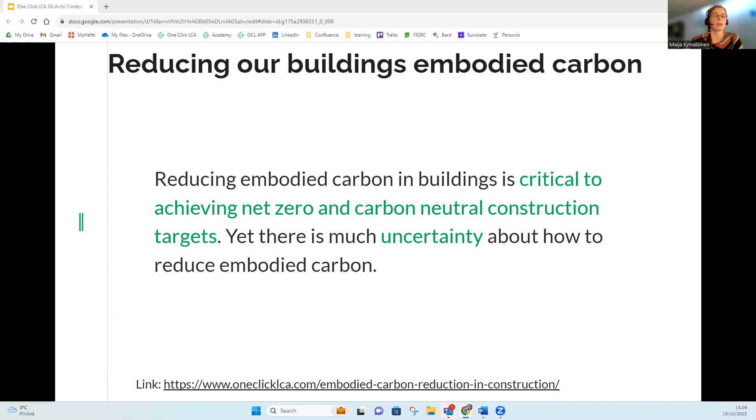We created an example baseline building design to quantify the potential impacts of adopting the different embodied carbon mitigation strategies. I've added the link here if you wish to check it out from the original document. Based on this baseline building, we will see, if we check all these principles, how we can reduce the embodied carbon emissions. So our baseline building is a 7,000 square meter office building. It has 7 above ground floors of 1,000 square meters each, 2 underground parking levels, a precast concrete frame, and a 60-year assessment period, assuming that the building would be kept in a condition pleasing to third parties.

So before we actually go in to see the strategies, I would like to remind you that when you begin working on embodied carbon, you should always make sure that your building has a decent energy performance and whatever low carbon energy supply options your locality can afford or offer. Even though we are talking about embodied carbon, we do know that operational carbon is very much still there, and it's not going anywhere, at least anytime soon. So you need to consider these as well.

And also something that probably is a difficult thing to achieve as an architect: avoid sites where transport relies on private cars and long transport distances for users. But if it can be relocated, it is worth thinking about the options, so we can avoid private cars as much as possible and rely on public transportation. This is, of course, outside the building LCA scope, but it's something that in a holistic approach you would have to consider as well.

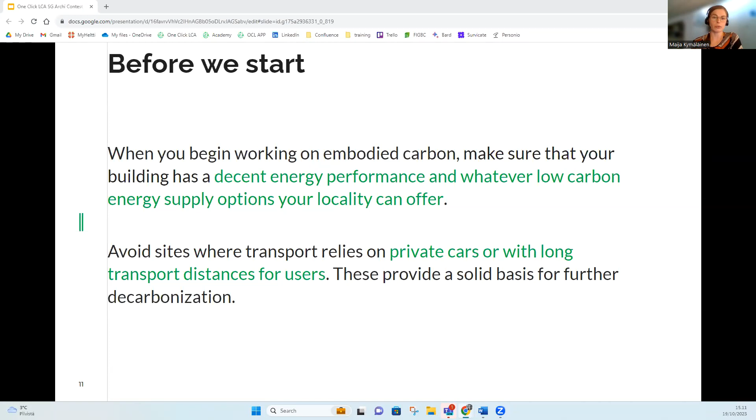So the first commandment, do not build for short term, is basically the most effective. Optimizing the life cycle impacts for anything less than a 50-year span is basically not worthwhile. The shorter the service life of a building, the more impacts you will get per year. So if we build for 100 years, we have, of course, 10 times less impacts than if we build for 10 years, because everything would then be replaced every 10 years. So the longer buildings last, the more sustainable they are.

And if the need for the building is not sustainable, for example, if there are ongoing demographic changes or zoning changes, this may be addressed by designing either a building that is highly adaptable or a modular transportable building that satisfies the demand for a shorter period of time. For example, in Finland, we have a lot of daycare buildings that are built so that they can be moved as they are to somewhere else. Because they are often built in areas that have a lot of construction and people moving in, there might be a need for a bigger building at some point, so the smaller temporary building can just be relocated to another part of the city.

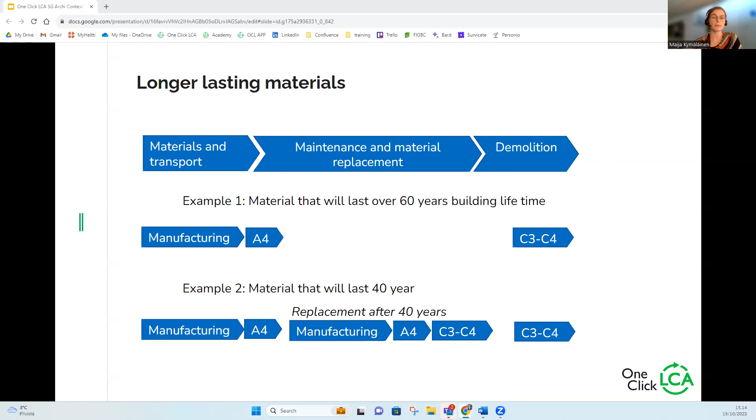And the potential carbon savings in our baseline building are up to 50%. Compared to a situation where the service life is limited to 25 years, the annualized materials-driven carbon impacts are, in this case, 120% higher. And if the building can be converted to another use, the impact is reduced even further. So after the service life, if you can use it for something else, that's even better.

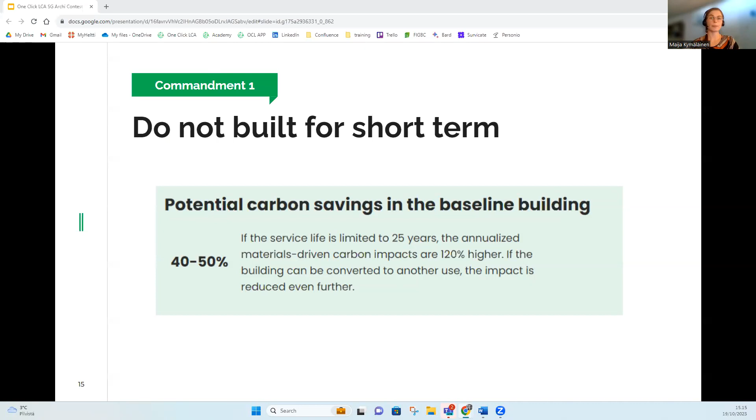The second commandment is to avoid sites requiring soil stabilization. Deep foundations can usually mean quite high emissions because they require a lot of materials, and this material is usually cement, concrete, and steel. These are all very carbon intensive materials.

And of course, I recognize that architects don't really have the means to affect site selection. But if you have the ability to influence the way the building masses are divided on the site, that makes a big change. So what you should consider is the distance to bedrock, and think about ways to mass the building so that the biggest masses are where the distance to bedrock is the smallest. It's also worthwhile to think about the overall mass so that the required material for the foundations would be reduced as much as possible.

But if you are committed to the site and you cannot avoid these foundations, you should think about the mass, the bedrock, and lighter frames, for example timber or steel. And finally, you should avoid cast-in-place concrete, which tends to result in the heaviest of all structural solutions.

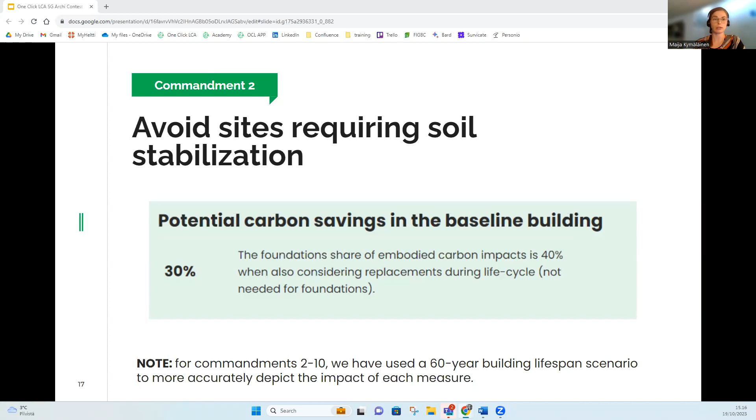And then the third commandment: consider structural options. Could a lighter or a timber frame work? In general, the structural frame is responsible for the majority of the impacts, and it should thus be addressed as a priority. Reducing the mass of the frame reduces the need for foundations and, of course, the overall material need.

Wood, for example, is a relevant material to consider. These materials are inherently less carbon intensive, so they require less energy to be produced. For concrete, you would need the excavation of minerals, the crushing and processing of those minerals, and a huge amount of energy for calcination and so on. But for wood, you need energy to harvest and transport, and sawmills often require little external energy because they can use residues such as bark and sawdust to create heat for drying and other processing.

Wood is also a natural, renewable material. If you harvest from sustainable forestry, new trees will replace the ones you remove. And it's a natural carbon storage: about half of the mass is carbon that is removed from the atmosphere and stored as long as the wood is in use. At the end of life, the wood is usually burned, so the energy released replaces energy from other sources, which nowadays is mostly still fossil. Wood also has good strength to mass properties, good thermal properties, and is rather cost effective. So choose wood if you can.

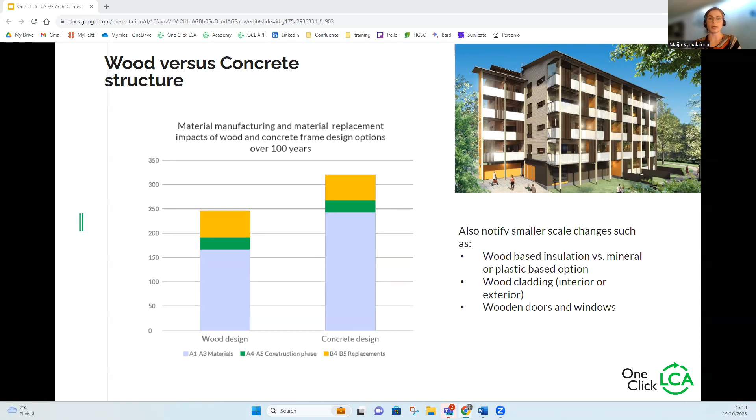In this graph, we have a comparison of a wood and a concrete frame. With wood, we can achieve a 10 to 20% difference in embodied carbon, considering that the structural performance is the same. It should also be noted that smaller scale changes, such as insulation, cladding, and other building parts, can also reduce the impacts, because the small savings pile up and can result in a significant reduction. So the potential carbon savings in the baseline building are again 30%.

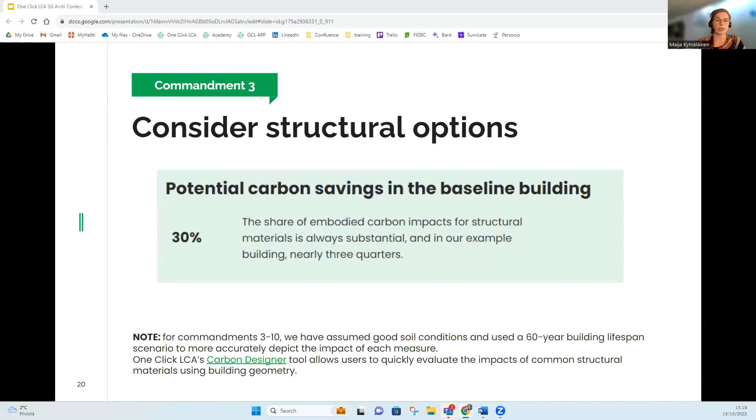And then commandment 4: choose low carbon products. This should be done by setting clear requirements and selecting the right suppliers. The requirements could specify, for example, minimum carbon performance targets or other measures, such as stipulating the use of recycled binders for concrete.

This strategy works effectively for all materials where supply is competitive and some suppliers are willing to supply products with improved environmental performance. And comparing these products is becoming easier and easier as producers are producing more and more EPDs, which are, as we talked about, very reliable documents on the environmental performance of a material.

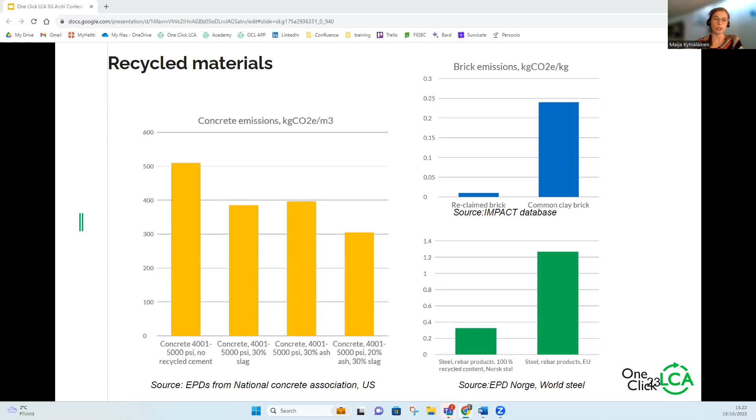And then in green, we see steel rebar. So there's an average EU value as the high column, and then a smaller column for this 100% recycled content. So again, steel is of course quite easy to recycle. So it's a much more energy efficient process. And then choose low carbon products. So potential carbon savings in the baseline building is around 10% in this case.

Commandment 5 is to optimize the building shape so you can achieve a mass reduction with a compact shape. So as a general rule, a simple shape is more materials and energy efficient. So the smaller the material quantity, the more efficient building you have, of course. So a more complex shape drives these external wall demands, for example, and also requires additional access corridors. And what should be noted, of course, is that elevator shafts, for example, are needed in different locations if we have a bigger building or a different shape, and corresponding room area increases.

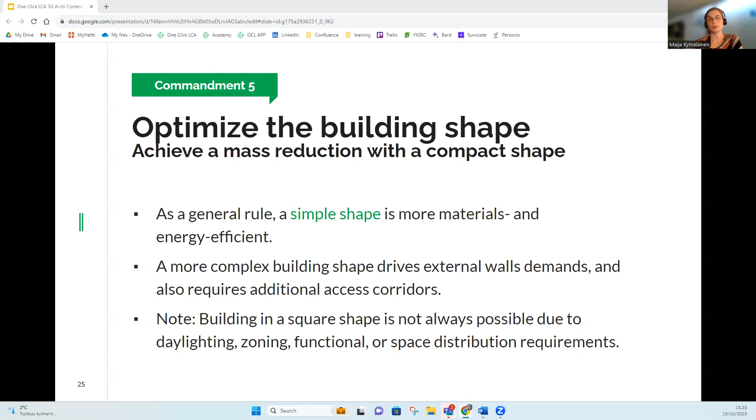However, it's not always possible to create square buildings, but it does not change the fact that simple shapes with comparable function and materials mean lower impact. So this is something to consider, taking into account, of course, the zoning, functional, and space distribution requirements, for example. And the potential carbon savings in the baseline building is about 10% here.

Commandment 6 is to design thinner floor slabs. So horizontal structures are responsible for a big part of the embodied carbon emissions. And unlike the envelope, the amount of slabs scales linearly with the internal area requirements. And also, we can reduce the envelope height if we reduce the thickness of these slabs. So, of course, they provide structural, acoustic, and fire-resistant capabilities for the building, and may also embed piping and other installations. But there is usually at least a bit of room to reduce the thickness.

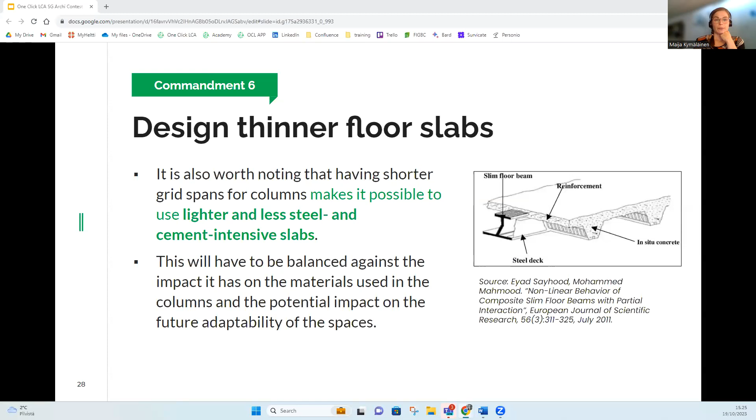And some good practices include using these innovative technologies, for example, Delta Beam, Bubble Deck, and hollow core slabs in concrete construction. So, of course, do bear in mind that care should be paid to overall design and choice of the floor slabs used. But then again, it should be noted that having shorter grid spans for columns, for example, makes it possible to use these lighter and less steel and cement intensive slabs. And in our baseline building, this results in a potential carbon saving of 6%.

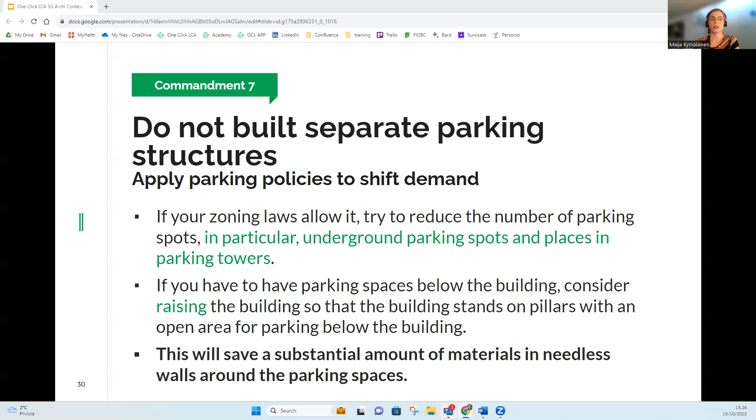Then commandment 7, you should not build separate parking structures, and preferably apply parking policies to shift the demand if your zoning law allows it. So in particular, underground parking spots and places in parking towers should be avoided if possible. But if you have to have these parking spaces below the building, you should consider maybe raising the building so that the building stands on pillars. And this will save a substantial amount of materials from these walls that are not needed anymore.

So here's an example. The initial concept was to have two basements for car parking here, but removing the retaining walls and having the customer agree to one parking floor only, we got a really high reduction in the building impacts. So this was almost 5% potential reduction in carbon.

As commandment 8, we have use movable or refurbishable wall elements, so designed for adaptability. And this is to solve space redistribution issues. So as the floor plan configurations may often change, for example, in offices is quite common, it's a good practice to use these reusable and possibly movable internal walls to the extent that they work for the building function. So similarly, the electrification that tracks seating arrangements in office buildings.

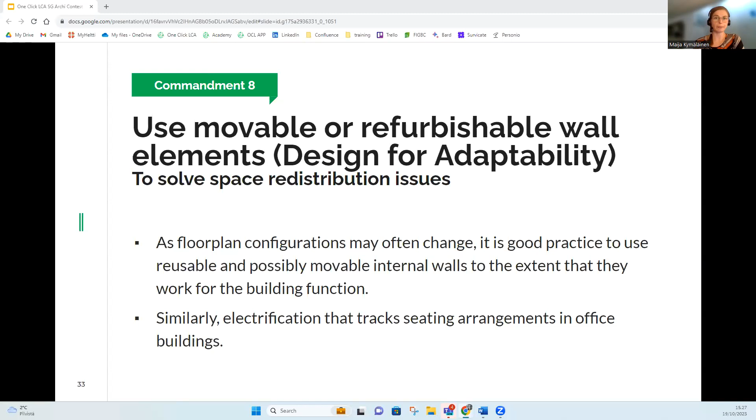And this design for adaptability means that in the future, if I need to do refurbishment, it should be as easy as possible. And other methods are, for example, applying construction practices that make it possible to remove the elements intact. So this is called design for disassembly. And in our reference building or baseline building, we got a 4% potential carbon saving by using these movable or refurbishable elements.

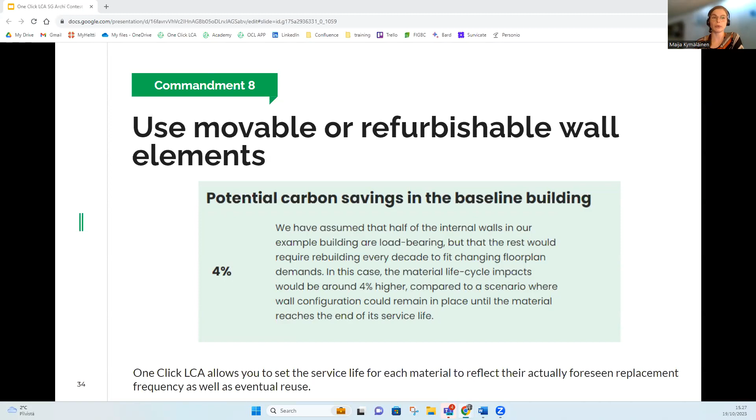And then as 9, avoid elements with limited value. So this means flooring, ceilings or facades mainly, but also, of course, other elements. So if your material provides only an aesthetic function, maybe consider omitting it. If your internal ceilings are, for example, not providing acoustic or fire protection, the entire element could maybe be removed. And this would also allow better maintenance, access to installations and cabling. So no need to take anything apart to reach them.

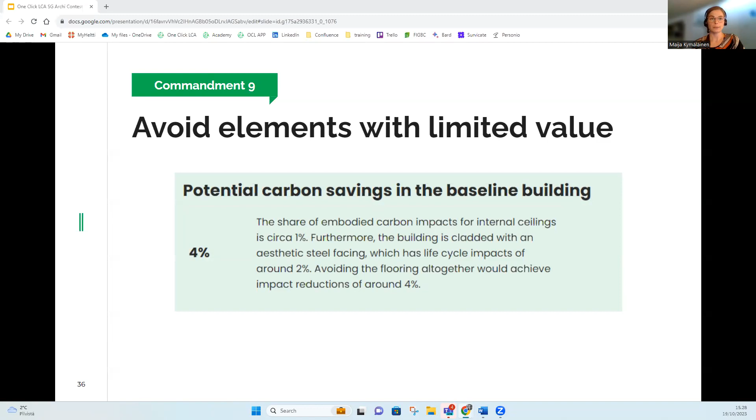And the same consideration applies to flooring. So a simple polished concrete floor could be a good option for some types of spaces. Of course, not all, but this is something to keep in mind. The potential carbon savings here were 4%. So here we considered if the building is cladded with an aesthetic steel facing, and also we took off the floors and used only this polished concrete. So these two choices. And also, internal ceilings were also taken out.

As commandment 10, choose long-lived solutions for windows and roofing. So investing in durable materials means fewer replacements over time, which again means fewer carbon emissions, less waste generated, lower life cycle cost, and less tenant disruption. And of course, it's very cost effective because you are using materials for a longer time. So the replacement need is smaller, and thus you also save money for the client. So what is durable and suitable material for your market varies depending on the conditions, but the principle stays the same. And potential carbon savings here are 3%.

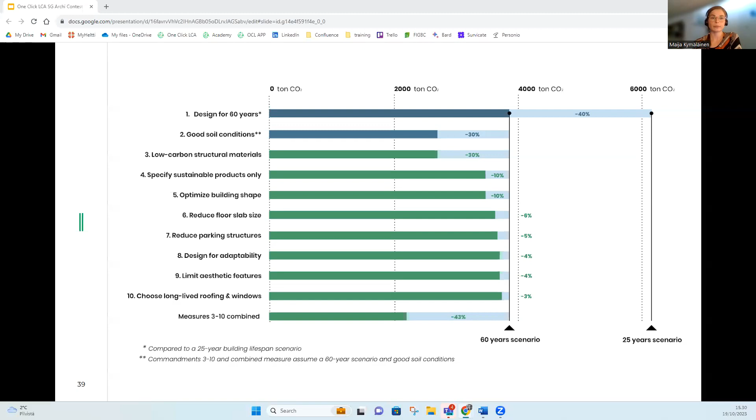And of course, these 10 commandments are not all. There are many more, of course. And these could include, for example, incorporating design for disassembly and other circular economy principles into the design, buying local materials whenever possible to reduce transport impacts, ensuring structural material strengths are not generalized but optimized for different uses, reducing waste through careful specification and buying with take-back agreements, and considering, of course, the material longevity.

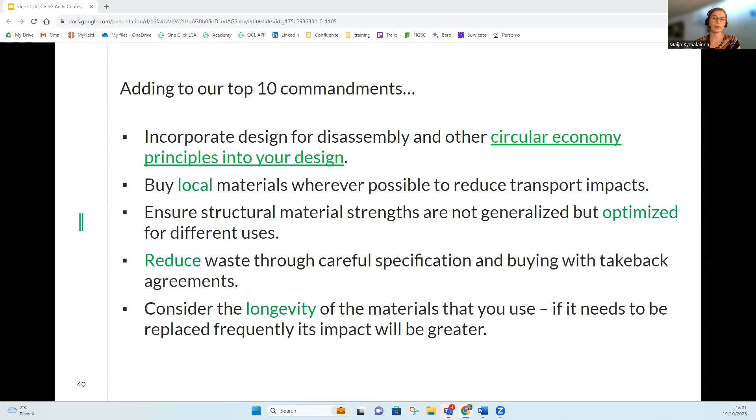So even though something might seem better on paper, with small impacts, if it means that it has to be replaced more often, then we get again these material manufacturing impacts that just multiply as many times as the material needs to be changed. And since the contest also entails this refurbishment project, I would suggest you check out these 10 ways to reduce embodied carbon emissions in refurbishment. So if you click that open, it shows you a similar kind of report, but adapted to refurbishment.

Yes. So let's apply these practices in an example project. So I will now move over to One Click LCA. First, I will quickly go through how to register and activate your account. So go to oneclicklca.com, log in, new user, register, fill in your information, and then once you get the email, you activate your username and then log in to the platform.

And then what you have to do to activate your account is to create a building project, by following these instructions. But now I will actually go here to show you once more. Let's check.

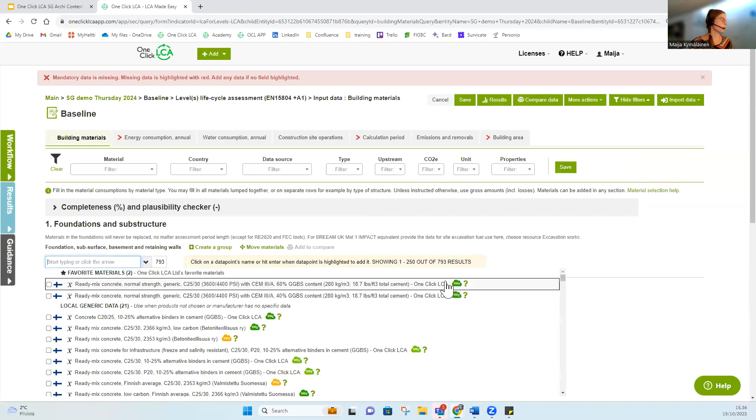Let's see, something for the foundations, for example. Let's see what we have here. Okay, we could go for normal strength or something else. I will go and find C50 concrete, so ready-mix concrete with high strength. And we will choose a very generic one. So this one has very little recycled content in it. Let's take this one, for example, and we are going to make a foundation slab. So this is 2,000 square meters times, for example, 50 centimeters. And then we click save.

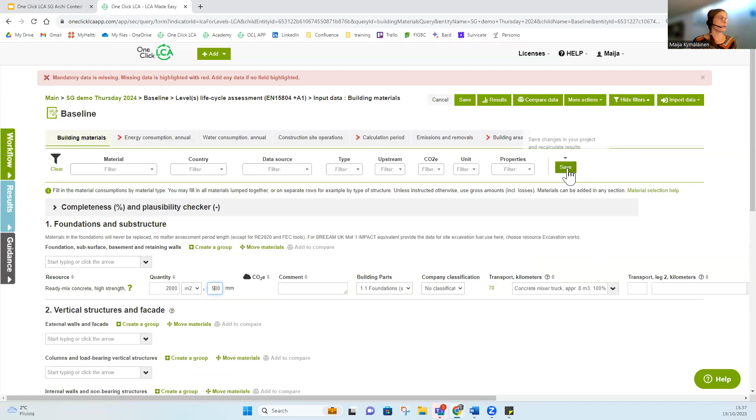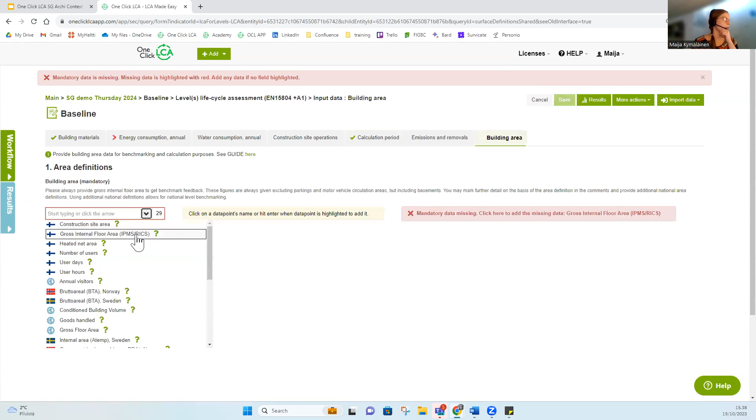And before we go check how it looks, I am going to go to electricity consumption and just put 0 there because I want to show just the materials. Hope that it works. We are calculating for 50 years. And the building area is 10,000 square meters for gross floor area. Yes. Okay. Save. So now we only have that one concrete data point there. We are going to save these and go to the main page. So whenever you click this, you go to your project base.

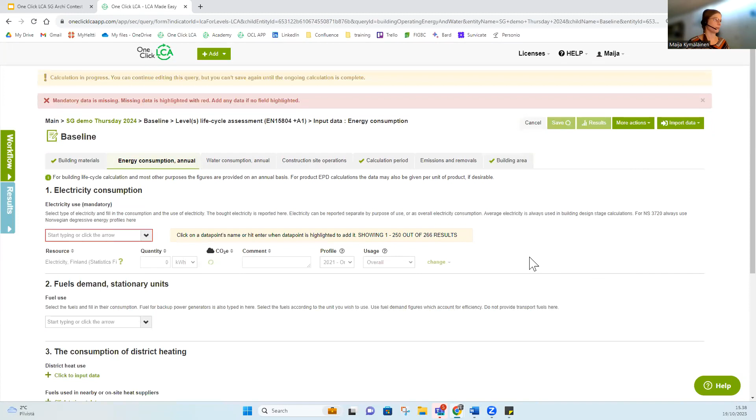And it did not approve of my 0. So I'm just going to check with 1 if that works. Oh, yes, sorry. Of course, I need to select the electricity first. So that's why it was problematic. Let's see if it works now. Yes, okay, now it works. So we go to the project main page and see that we have results here. We only have this for one design, so I'm gonna add something else. So we create a copy for an optimized design. So I just go here and click copy. And this is copy of baseline, for example, added binders.

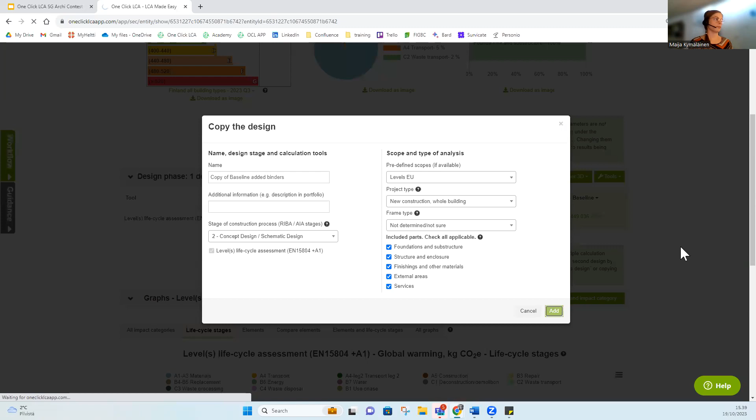Add it in. It's the copy, so it has the same materials. But if we go to building materials and we change it, so let's see, we got C50. High strength, and then we had that very generic material with no additional binders, but we are going to go with this that has, for example, 30% fly ash in the cement, so it's the same strength.

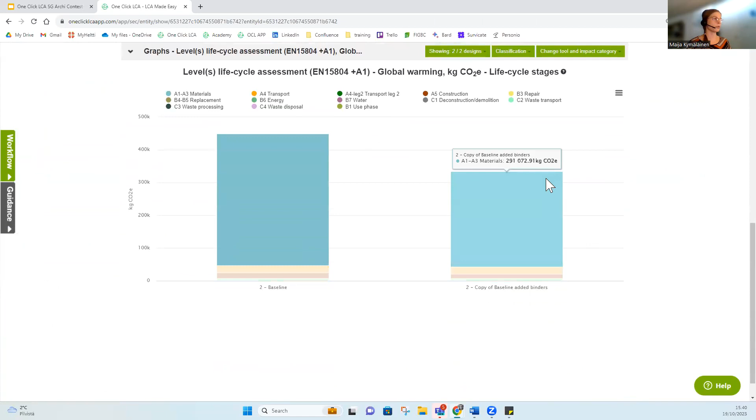This could be, I could use the replace function as well, but now I just do it like this, so it's another way of doing it, and then just remove the first one. And then we save. And once it's saved, we go back to the main page to check what it looks like. Okay, so it says that we have 25% reduction. So now if we go here with life cycle stages, we can see that we are already down this much.

And then, I don't know, the engineer comes over and tells you that a lower grade of concrete is okay. So we might want to change it into a lower grade because higher grade means higher amount of these binders in it or higher amount of cement. We make a copy again, and this is copy of baseline with lower grade. Add it in.

And then go into the design again to change the building materials. And now I'm going to do it the proper way. So go to change, replace. And now we have the quantity, but we want to have a lower grade. So for example, C25, which is something quite commonly used in Finland for foundations. So we are going to choose, for example, this ready-mix concrete, C25/30,

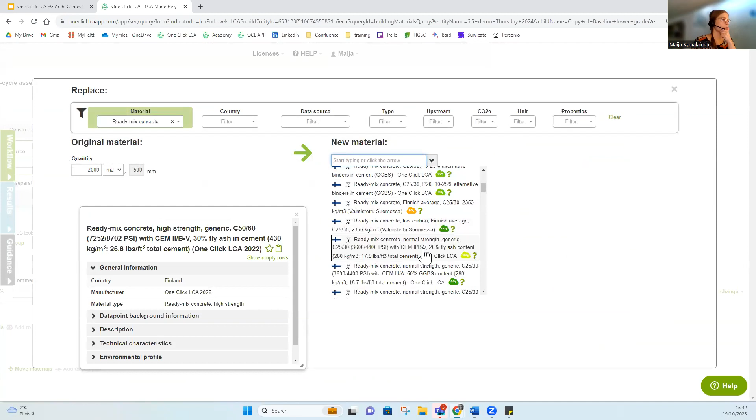with, I don't know, 60, but I think we could go with, is there anything with fly ash, for example? 20% fly ash is there. 30% fly ash. So this is the same kind of percentage of additional binders in it. And we are going to save. And then again, check the front page, what it looks like. Go to life cycle stages, and again, we are reducing our impacts for that one material.

So this is something that you can begin to think about your choices, optimize, and of course within the requirements and technical performance. So that's quite important to always think about. But yeah, this is how you could maybe start. And just as a small note, these kind of traditional binders such as GGBS and fly ash are actually running out because the need for them is so big. So new materials are being developed continuously.

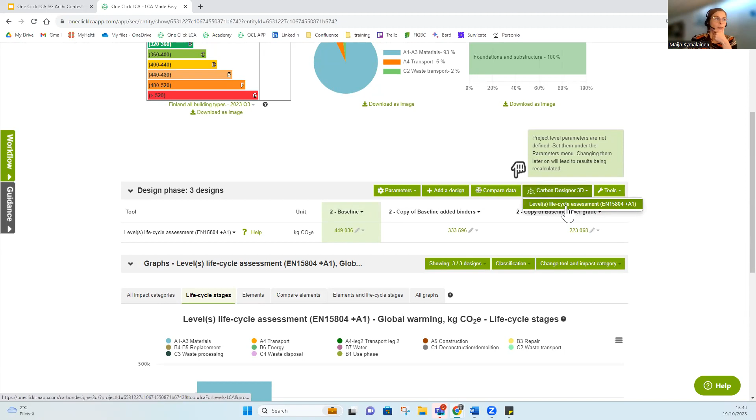But promotions aside, this is how you could do this materials comparison, but now we will look how you can start optimizing an actual building. So we'll continue with this same project we've created. And there is a tab here called Carbon Designer 3D. So we are going to use this one it asks for the tool. So we are using this +A1 for Level(s).

And then we are taken into Carbon Designer, which is another tool, but it's directly connected to the One Click LCA main interface. So whatever you do here, you can import and transfer everything you are doing. So here, you can create a design, or if you have made designs priorly, you can compare up to 4 different designs. Since we have nothing there, we are going to create a design. The first step is to enter this building information. So we are going to make a baseline building.

And it asks to enter this reference building. So what you do here is you select the one that is closest to your region. I don't think that there is a Finnish one. No, because this Carbon Designer tool is connected only to the Finnish regulatory methodology that uses only carbon as the indicator, global warming potential. So we need to choose a closest one. So that would be Swedish reference building.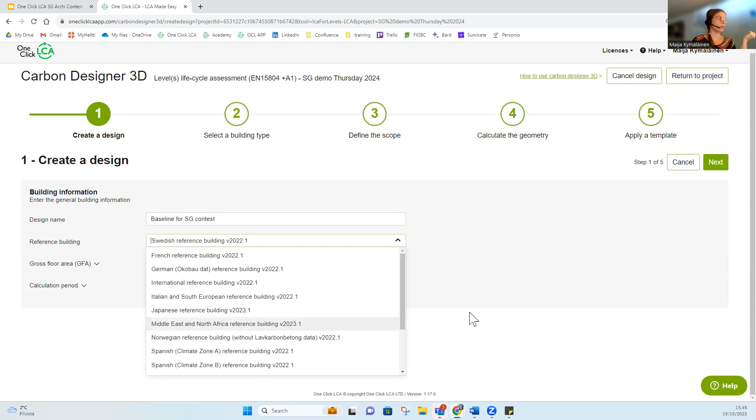And this is quite important because it makes these assumptions and calculations based on the ways of constructing in different areas. So if you make a building that is located in Finland and you choose this Middle East and North Africa reference, for example, it will give you very strange results. But yeah, we chose Swedish because that is the closest one. It's given our gross floor area here already, and also the calculation period. So check those out. If it says something that it's not supposed to, just correct it. And then we go here.

And then it asks for the building type. This is also quite important because the calculations and the building geometry and so on are related to the typical building in that area. So we go with the apartment building. So there's quite a few of these that you can choose from.

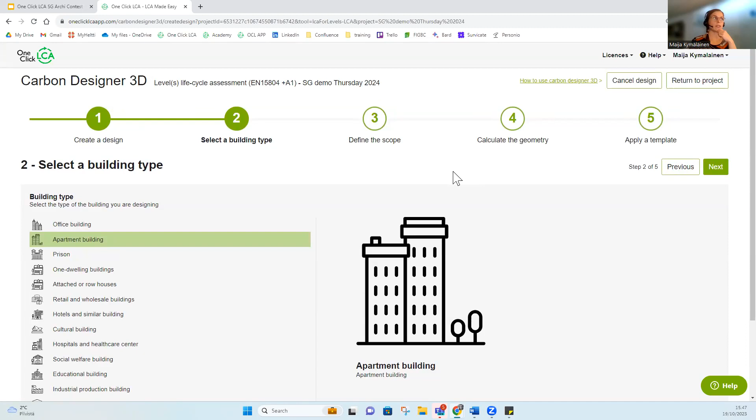And you can also do this modeling for mixed use buildings. But for that, you would have to choose what forms the biggest use. So if it's an apartment building that has a bottom floor with, for example, retail area, these kind of spaces, you would choose apartment building and then just adjust the material quantities later on. But yeah, now we go with the apartment building and click next.

So then it wants to define the scope. For a new build, we are going to have all of these. It's also worthwhile to notice that this has a lot of information. So if you click on these little arrows, it tells you what is included in all these different building parts. If you were doing a renovation or a refurbishment, you could choose to leave out some of these. So for example, foundations and ground slab might be there already, maybe also the enclosure, and just change what you want. But now we are doing this new build, so everything is included.

And here it wants to specify the number of above ground floors. So we did this already, but if you haven't done this before, you can do it here. And also the number of underground floors. So here we have one unheated floor. And then it wants to define the structural frame and foundation options for your building. So you need to define the structural frame because this affects the density of the column grid and the quantity calculation for the different structural elements.

Yeah, so I am choosing this one. This is a rather common frame type also in Finland, so precast column beam frame. Other options would be cast in situ with different column spacings, steel frame, concrete load-bearing walls, CLT load-bearing walls, and then this glulam column beam frame.

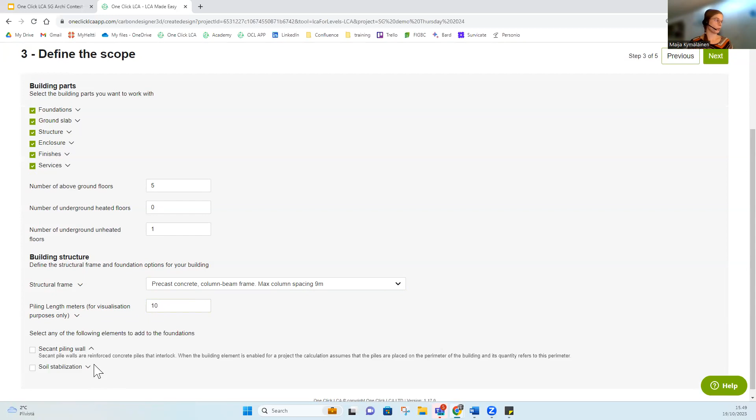And then piling length for visualization, so you can add piles. This is not accounted for in the calculation, so it's for visualization as it says. And then you can also select any of the following elements to add to the foundation, so this kind of secant piling wall or soil stabilization. And if you want to know more, you can also see from these little arrows. But now we've defined the scope, so we click next.

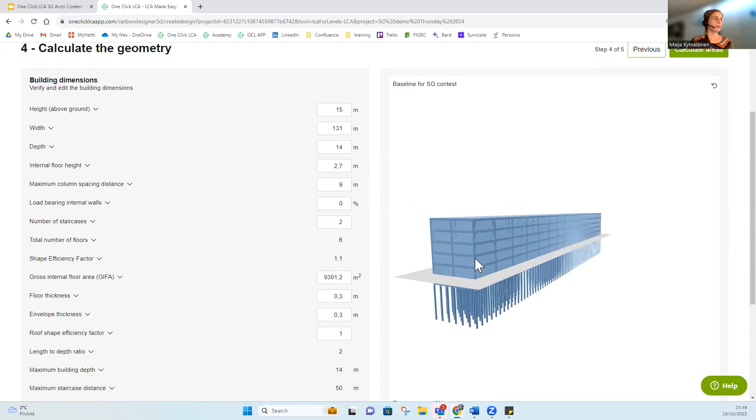And it calculates the geometry for us. So the Carbon Designer buildings are these kind of shoe boxes, so they are always rectangular. So if you have a building with a more complex shape, you would create this baseline building using this kind of shape, and then, for example, if you had different sized floors, you could calculate the added or deducted materials and then just define this later. But here you can get this quick and easy first assessment, basically.

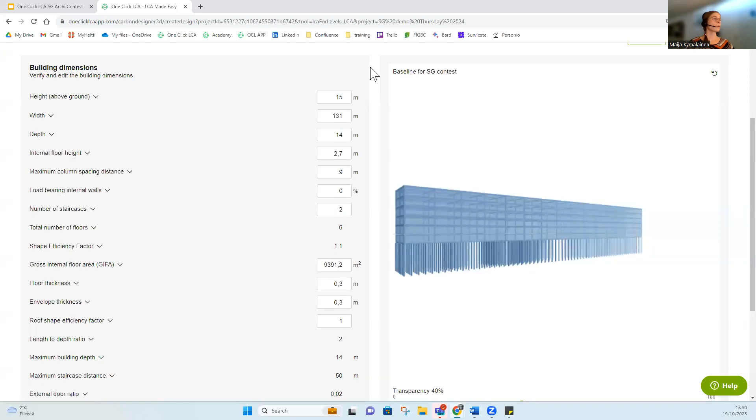And in an early stage, you might not even know what shape your building is going to be or going to look like in the end. So this is something that is very useful to do in the early stage. So yeah, this is our building. It gives us the different dimensions. You can always click again here to see what is included and also how it's calculated if you're interested. But we are quite happy with this.

So I'll click next, and then it defines the building structures as well. So here you can also edit the foundations, for example, if it needs to be smaller, or the ground slab needs to be a different size, or you decide that you want less walls. So for example, these internal walls may be something that you would like to alter. It also adds these default services. So these are calculated for our gross floor area, so this 10,000 square meters of internal gross floor area.

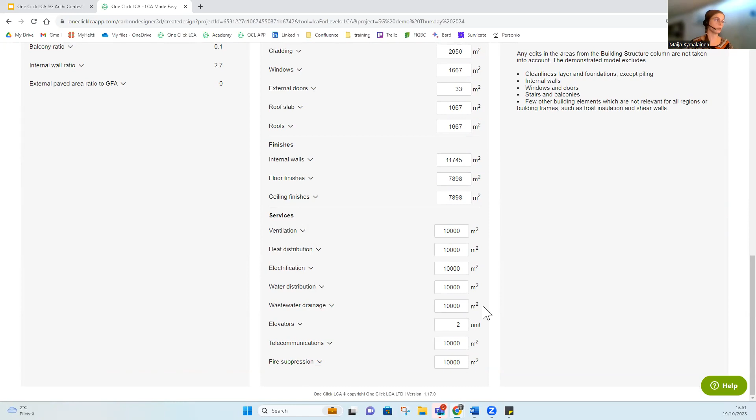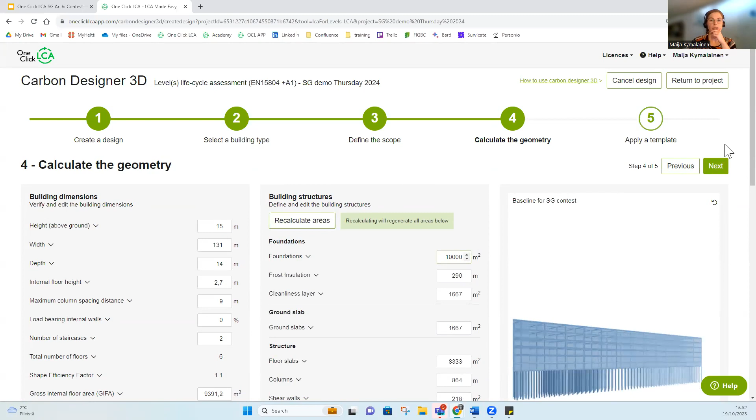And once this is done, did I have something to say about this? So yeah, these dimensions probably should not be changed if you are in this early stage and don't yet know the final dimensions. If you choose to change some of the geometry values, the other values update accordingly. So if you make changes here, I believe you need to recalculate areas. But if you make changes here, you don't need to recalculate areas. But it tells you what to do. So it's quite safe to make these changes, just if you are interested.

Okay. Oh, yes, sorry. The templates you don't need to worry about because I don't think that this license allows any templates or tool. So now we submit and it takes some time to calculate.

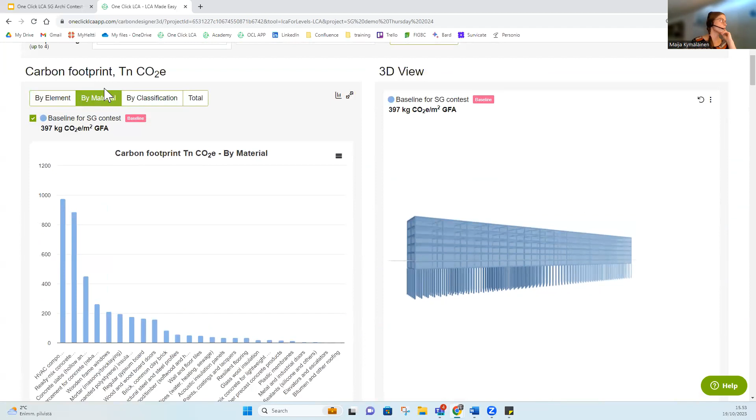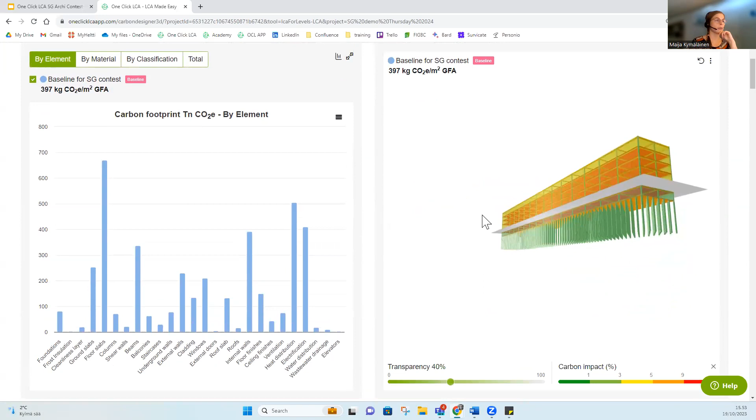And you can also choose here to see them in a different way. So this is by material, by classification, the total number. The total probably doesn't say anything now, but if we make these comparative designs, we can reduce it. And then it also shows us the 3D view. And here we can also activate carbon view. This shows us in color where the highest carbon impacts come from. So as we said, it's the horizontal structure, so the ground floor, or the floor slabs here.

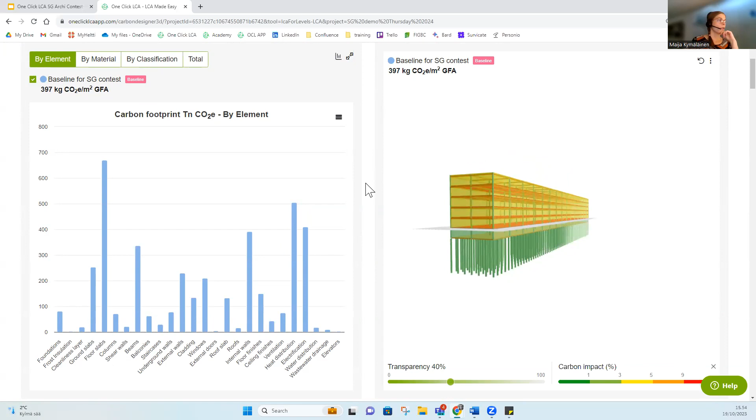Then if we scroll down, you can see the building elements and materials. These are all the elements in our building, divided by these different building parts. So we can click this open and also go from here. Here it gives us everything: what is the building part, what is the data point used for it, and also how much of the area it forms. So this is a part where you can start doing these mixed alternatives if you want. You can change these percentages. Also, it gives the total number of kilos of CO2 equivalent and how much it makes from the total. You can add comments or you can edit.

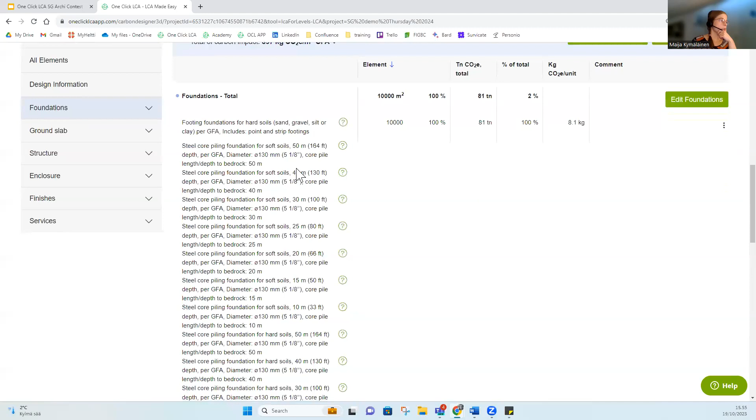So if you go to this show unused resources, it gives you a long list of different data points you can use. And these are usually interchangeable, so they correspond to each other. You can press the question mark to get more information on the data point. Let's go a bit back now. Yes, and then hide unused resources, too many to look at.

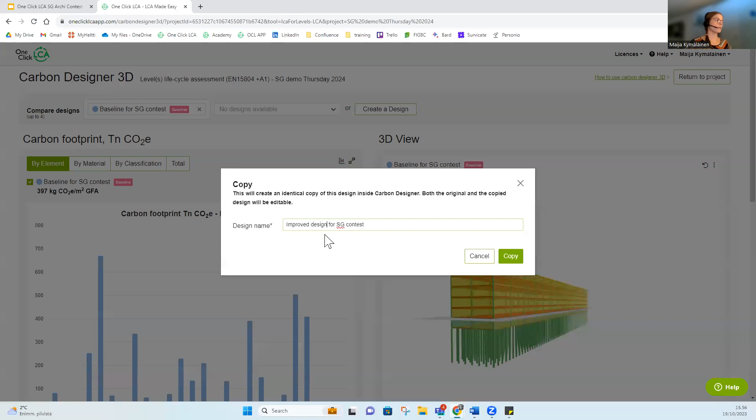So what I was thinking here is compare. We are going to make another version of this and start changing some of the materials. There's quite a lot of different places where you can do this, but this is one, so you can copy. This will create an identical copy, so we are going to make improved design copy, and it appeared right here. Next to it, it's at the moment 0% above baseline because it's the same design.

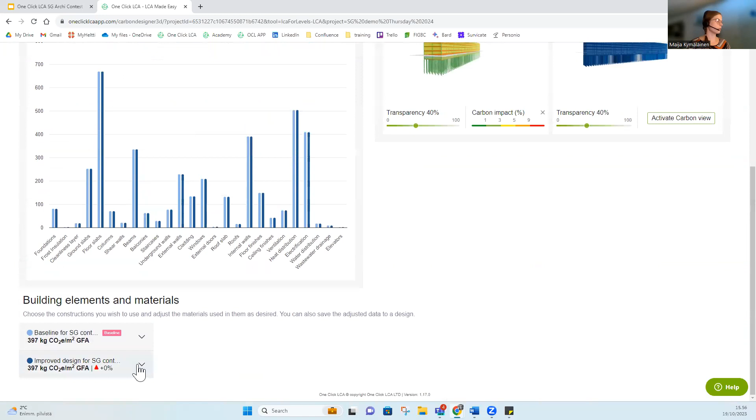So what we now need to do is to visit the baseline, click it close, and then open the improved design and all elements. So it will show everything. What we can start changing is the biggest one, which was the floors. So maybe we could change the floors if I can find them. Maybe the easiest way is to go here and just choose structure, floor slabs. Okay, so now I can see the floor slabs that have been used.

I can edit them. Get here some unused resources. I would like to put some CLT. So we are going to have CLT slab floor assembly, including mineral wool insulation. And what you can do is you can change the area or you can change the share. Usually editing the share is the easiest part. So once I type in, it starts calculating.

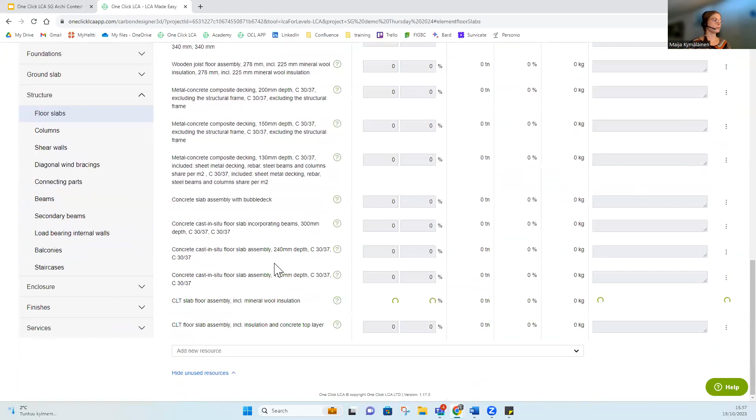And once it has been calculating, it brings it up here. So now, of course, we have 200%. So you need to put this hollow core slab assembly as 0 and then click, and then it will again calculate.

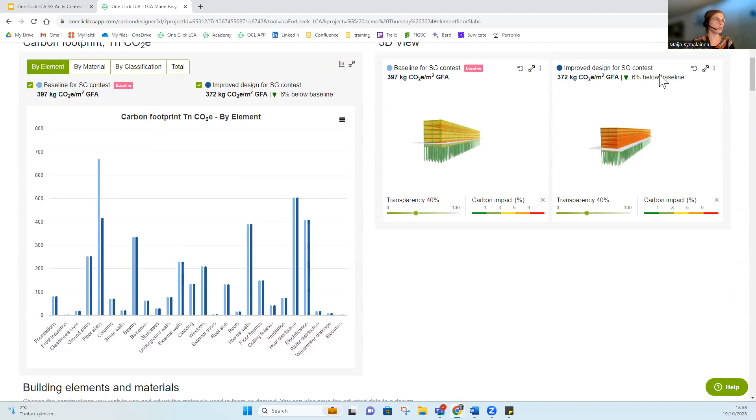So now we have changed it into CLT. So 100% is CLT, and we can finish editing. And if we go up, we can see our improved design has 419 tons of CO2 equivalent, while the baseline had 669 tons. So if we activate carbon view, we can see that the highest impact still comes from the horizontal structures, but the overall impact has decreased. We are 6% below baseline at the moment.

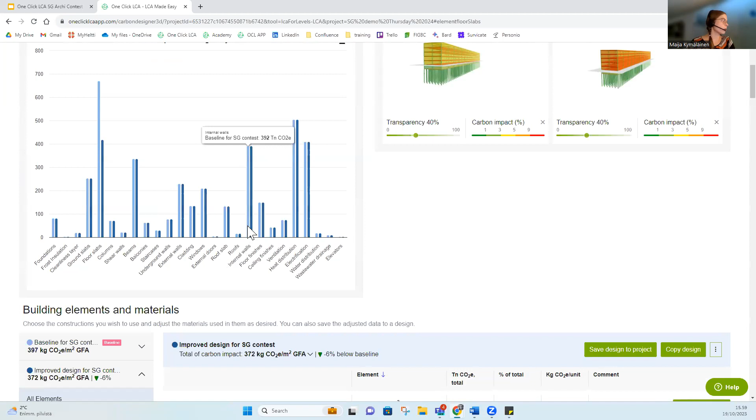So other things we could do, we can just keep going through here. Well, services is something that you probably cannot optimize too much, at least in the early stage. So the further you go, of course, you can choose the products that you will use. But if you are using these generic data points, there's not much that you can do about this. But we can go, for example, to internal walls. Structures. Not here. Sorry. Yes, of course, internal walls.

So we have a steel stud internal wall assembly with wooden interior doors. And here it's important that you keep the share as it is, or make sure that it stays at 100. So we can just change the steel stud wall assembly into wooden stud internal wall assembly, for example. Including mineral wool. Well, let's do this one, for example. So it's 100 millimeters, and we will choose this one. So we want 83% of this. We click.

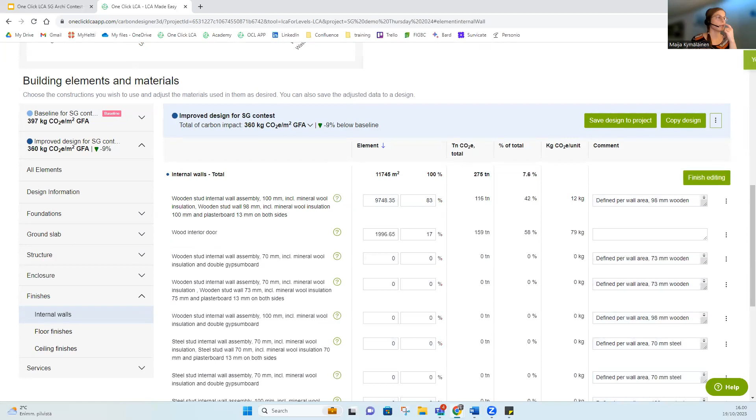And again, it will calculate too much. So we need to remove this original one. Yeah, and there we go. I think we need to finish editing. I was too quick, or maybe not. Yes, so here, finish editing. And then if we go here again, we see that our internal walls have smaller impacts. We are already 9% below baseline. So this is something quite easy you can do to begin optimizing these designs.

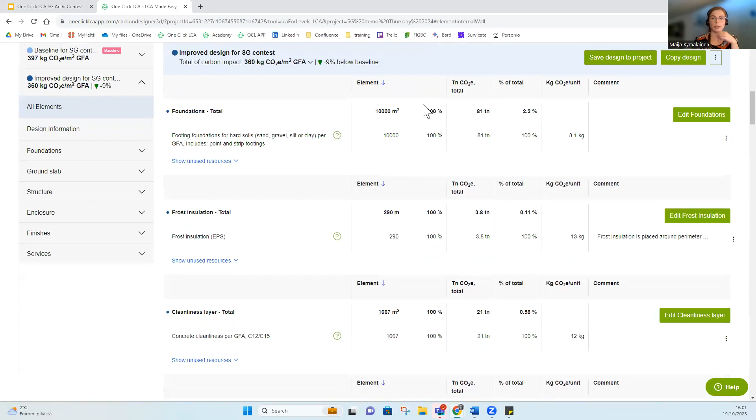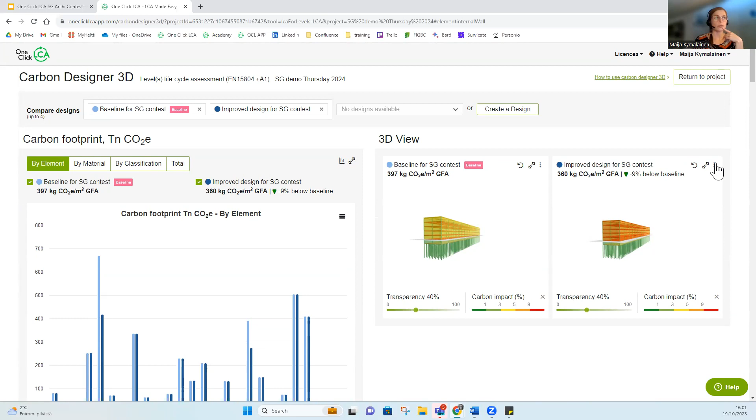And like I said, you can compare up to 4 of these different ones, and you can import whichever design you want to the main OneClick LCA interface. So one thing more is that, I think I mentioned these mixed frame options, you can just do it by alternating the share here. And so I think that we want this particular improved design to start working on closer. So I can click here, and there's several options. We can set this as baseline to compare to, or we can save it to a project. So this is exactly what we are going to do. So we save design to project.

This is a bit similar to the import process. So it asks what we want to do with the existing data. So there's a couple of designs that we used to make those concrete comparisons, but here I'm going to create a new design. And of course, if you click here on convert another, and you save, it allows you to bring also the other designs, or whichever design you want in this same page, into the OneClick LCA interface. So if I now click save,

sorry, my internet connection has been a bit slow today. So we'll see if we can actually do something with this.

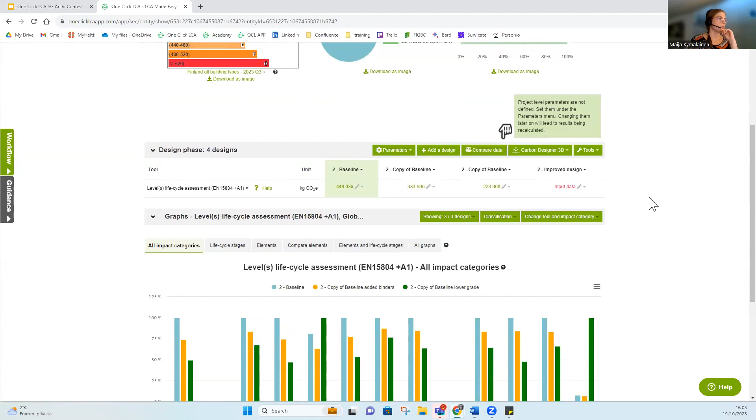Yes, design has been successfully converted. And where did it go? Is it this one? Yes, okay, so it's this one, improved design. It doesn't have the energy consumption yet, and it doesn't have the building area set into the software. So what else? Yeah, so now you can just go in here and start working on the actual design. So it has all the materials that we just put in there, or the carbon designer actually put in there. So this is what's there.

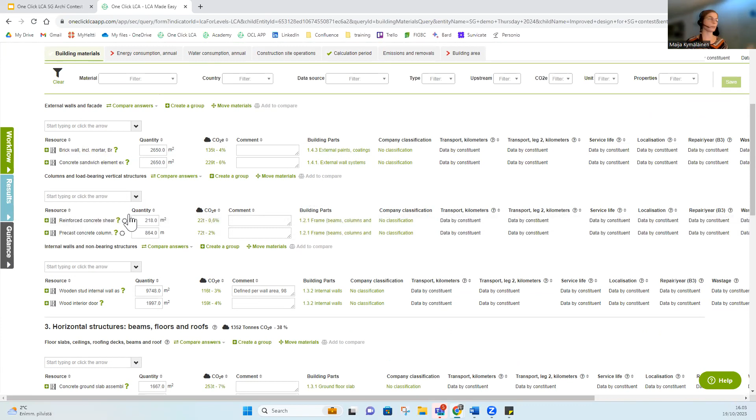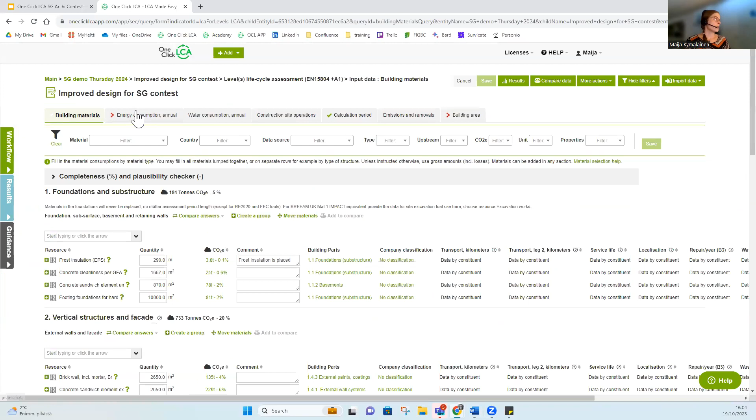These are mostly, I see, constructions. But anyway, you can start working on this as you want. So like I said, alter the materials, or you can check these reused material parts. If you want to change these generic data points, you can use, for example, the replace function, find additional materials and so on. And that's it basically. And then you just click on these different parts here to start putting in your inputs.

So for example, electricity statistic Finland, we are going to put 0 because we want to have an embodied carbon assessment here. And then calculation period was set already in the carbon designer interface. I would check it if my computer was any faster. All right, yes, it's 50 years. Building area, here you have to set that again. So you need this gross internal floor area, and that was 10,000 square meters. So then we click save.

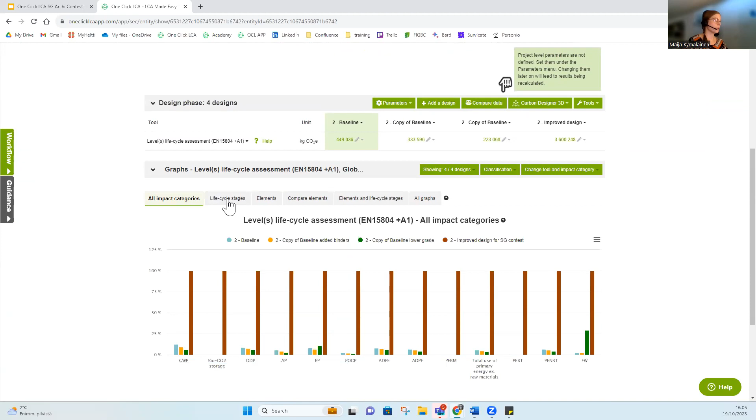Yes. And again, if we go to the main page, we can do our comparison. So of course, now our 3 previous designs only had that concrete, but now we have the entire building. So if you do this for several designs, you can also do this comparison here, for example, by the life cycle stage. And of course, these are downloadable.

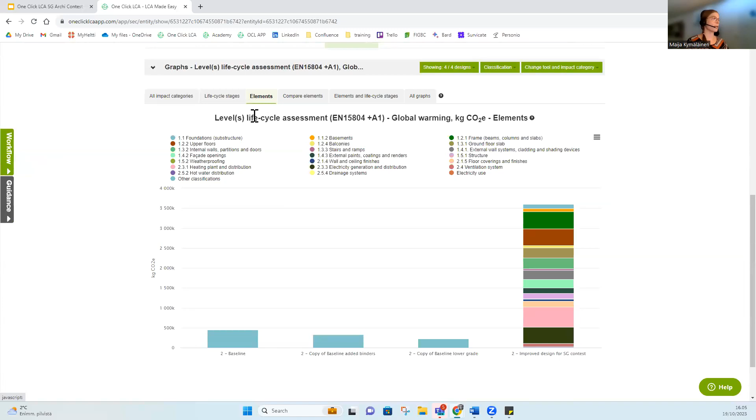You can do the comparison by element, also compare the elements. Of course, here it doesn't make much sense because we only have one building here. But yeah, you can do all sorts of things here. So this is quite a good feature.

Yeah, so I would probably want to tell you a little bit about the use cases. So what can you use the Carbon Designer 3D for? Well, it allows for this, as we saw, quick baseline building creation with minimal knowledge about the project. Additionally, you can use this to define reference values for emissions in the early stage. So your actual design, for example, should not exceed X amount of carbon dioxide equivalent.

So you can set it here by making a baseline. And yeah, the calculations are typical for building type and region. So fairly reliable, I would say. And yes, you can also do comparisons between new build and renovation options with regards to the environmental impacts. So you can create a decent estimate for existing buildings in such cases where you have, for example, no detailed

drawings or material quantities. And yeah, when saving the design to your project, you can then decide which parts are not part of the actual calculation. So you can, like I told, check the reused box for the materials that are reused and also define those materials that are newly added.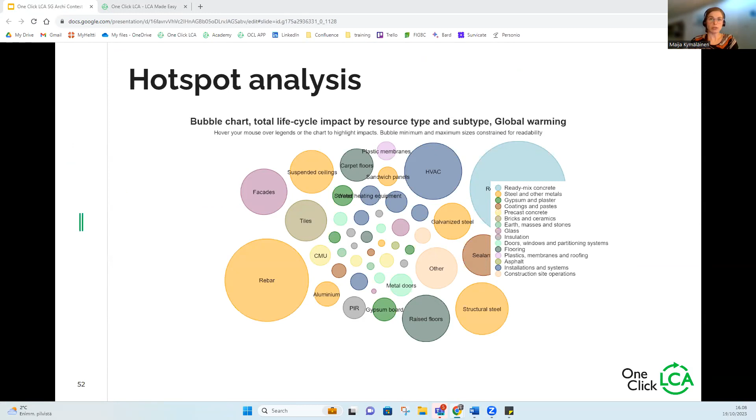You can also do hotspot analysis in Revit, for example. So as I said before, we offer a Revit plugin that allows you to easily move between these two softwares and bring material information to OneClick LCA for analysis of these environmental impacts.

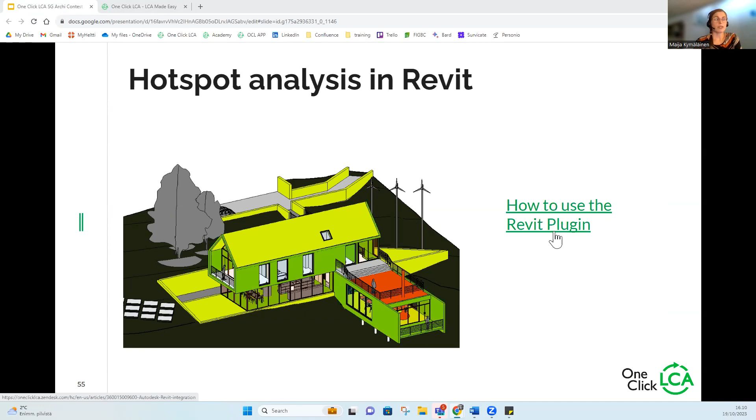So unfortunately, I do not have the time to go through this in detail, but I again recommend you to check out our other trainings, like for example, the upcoming bootcamp that has a session dedicated to this. But there's also a link here. So if you are interested in using Revit with OneClick LCA, you can click here and it will take you to the help center that has, like I've mentioned, all the answers you might be missing. So here we have a plugin overview and also some important stuff that you need to maybe know before you start using it.

Yeah, so finding better products is something that we are going to check next. You can also easily do this in OneClick LCA. So you can define, for example, the benchmark based on your material or the market benchmark, and then you can find better products, for example, for regions, and then compare. And now I think I will show you how to do this in detail. So let's see.

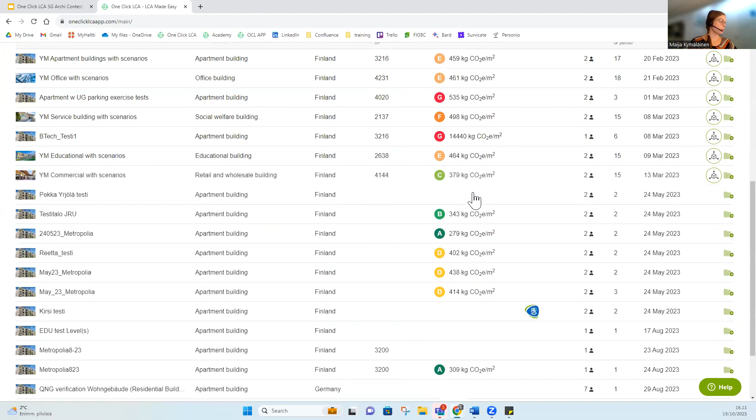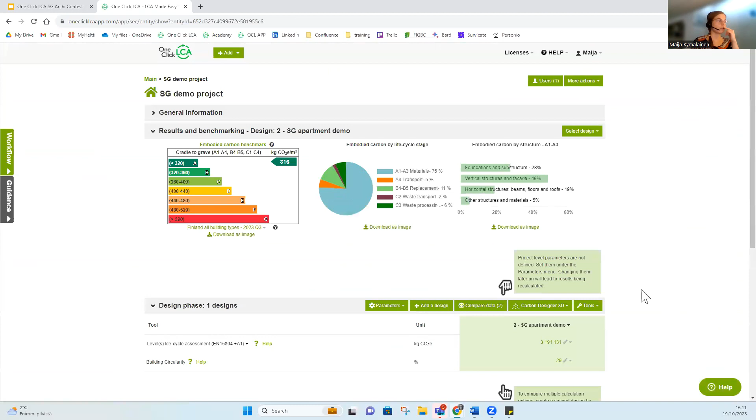So for those who were attending on Monday, there was a compare option in the software that we didn't really go through. I was just saying that it is there and you can use it. So for example, we could go to the Monday session's design project that I created. So that will be this one. And we can see what we can do with this. So we go here and we go to results.

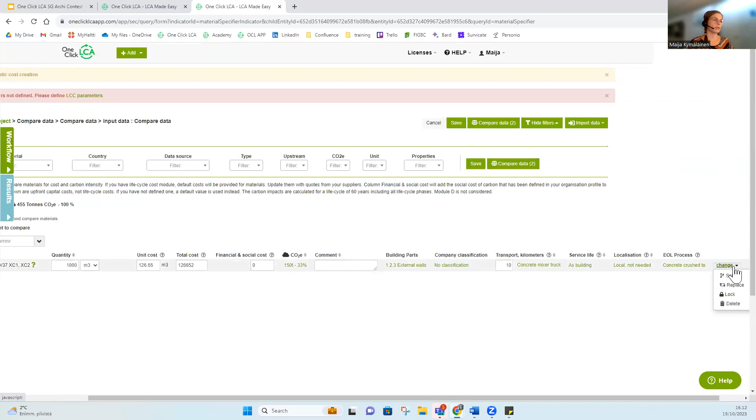All right, so for example, here we have the compare data option. So if we click that, I actually have added some concrete as a test, but I am going to show you how to do this. So we could go to edit data and let's just remove these two and add them again so you may see.

So we, for example, want to use Finnish concrete. So where can I find? Oh, well, that doesn't matter. So we are using Finnish things, and we want concrete, for example, C30/37. Ready mix concrete for external walls, sounds good. And we want to have a specific data.

All right, so actually I found this ready mix concrete for, where did it go? Save. Okay, this is odd. Where did it go? Sorry, I am experiencing technical difficulties.

Okay, there it is. So this is a ready mix concrete, quite normal, but it's made by Rudus in Roihupelto. So this is about 10 kilometers from Viikki or even closer. So it's a very local material. So we are going to compare it with another manufacturer specific concrete. Let's see. Okay, sorry. I think this was actually the only manufacturer specific concrete we had in Finland. So we are going to remove the country filter.

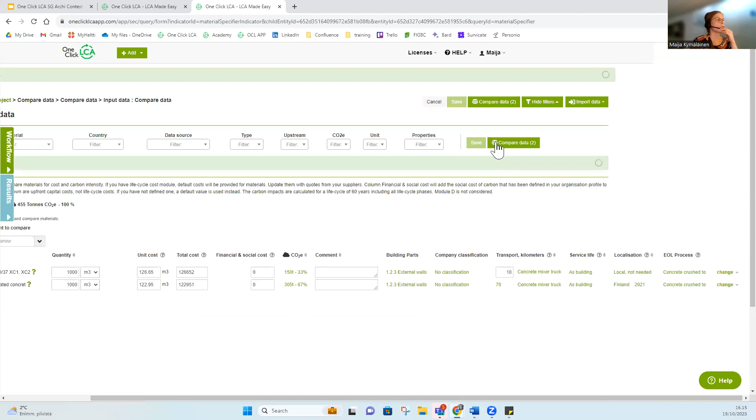And you can adjust different things. And because we know actually that Roihupelto is right next to Viikki, we are going to use 10 kilometers as the transport distance. And then we save. And then once it's done saving, you can compare the data. So it will bring you to this comparison graph.

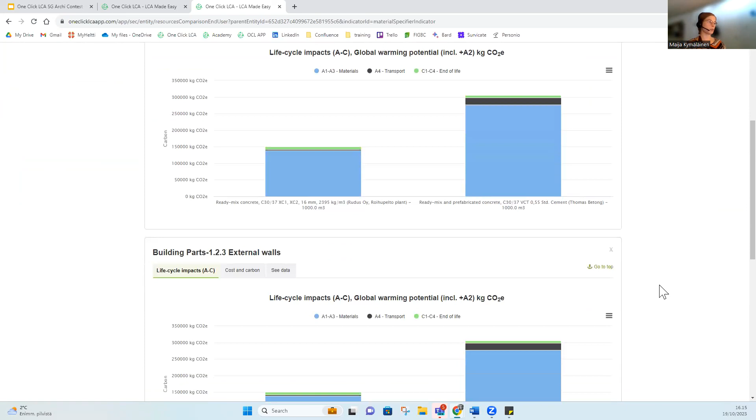And as we are very close to our location, the A4 or the transport impacts are very small, but also our chosen product has much smaller material impacts as well. So this is something that you could do to start comparing the data. And once you've chosen what you want, you can also import it to your design. And these parts are related to the LCC parameters, so life cycle cost. But this is something that you don't need to add there if you don't want to.

Then let's continue with this one. So a few words about interpreting the results and other aspects as well. So as we know, we've now gone through the main page over and over again. So if you go to the design, then return to project main page, you can quickly get this overview on how the different designs compare with each other. And in the results page, you can check the designs in more detail. So for each different design, you have the results there in detail.

So about the main page, we have the embodied carbon benchmarks here. So these are related to this Carbon Heroes benchmarking program that actually gathers data from One Click LCA. So whenever a design is made in One Click LCA, we have data from it. And these are anonymized and regionalized, like for each building type, and for that building type and that region, it will give you this embodied carbon benchmark, so rating basically your design against others in that region for that building type.

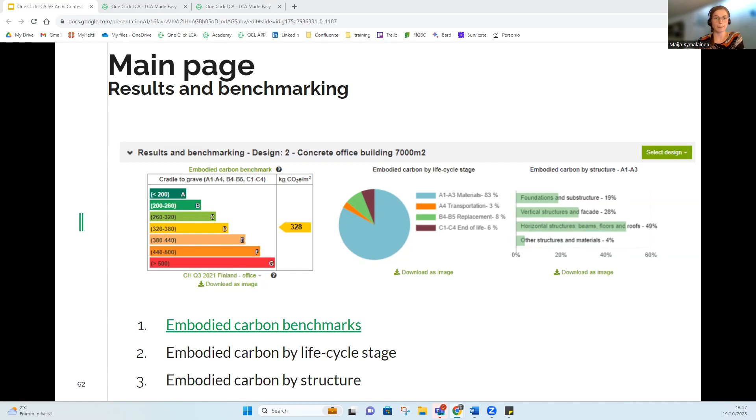The main page design phase results give you these results. So the unit depends on the chosen calculation tool. So for example, in Level(s), we have the total kilos of CO2 equivalent for that building. And for the building circularity tool, we have percentages of circularity.

And the totals are shown per design option, and these values can differ depending on the scope of the tool. And results populate only when the mandatory data is input. So remember to put in the energy and the floor area and the calculation period.

The graphs can be used to compare and allow sorting based on different settings, and the classifications and impact categories can be picked, and elements can be left out as well. The results page, so here it just shows you how you can view the results and input data. And on the results page, here you can compare the designs, but it requires, of course, 2 designs with data and the same calculation tool.

The results page gives you the option to download Excel results or Word reports. So you can get all this data also to your own file, and then you can choose what to do with it. So you can draw different kinds of graphs if you want, or analyze it a bit deeper if necessary. And in the results page, you can also analyze details per building element in percentages.

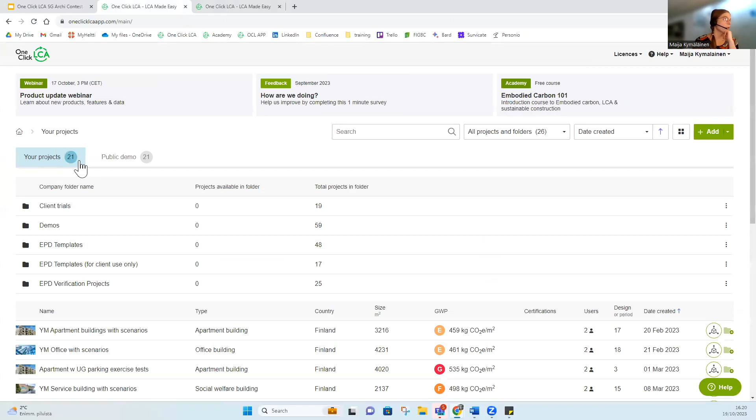And then we get a comprehensive list of all used data sources. And I could maybe show this to you as well. So if we go to the main page, I will show what the demo looks like. So here we have EU full building life cycle carbon study. So this is only the embodied impacts of this office building. It's made according to EN 15978, which is also the standard that Level(s) is based on.

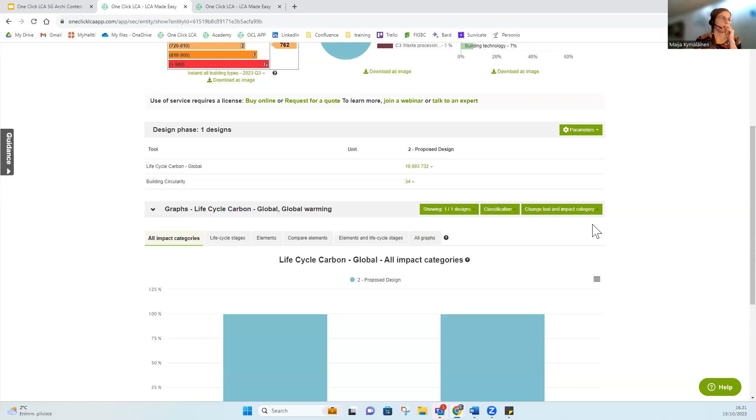So if we check out the results here, you can also go and check out how the material is input and so on. We are going to check the results. And here, if you remember from Monday or not, you can see the total carbon dioxide equivalent for the building for this scope. And this is per square meter per year, so 13 kilos.

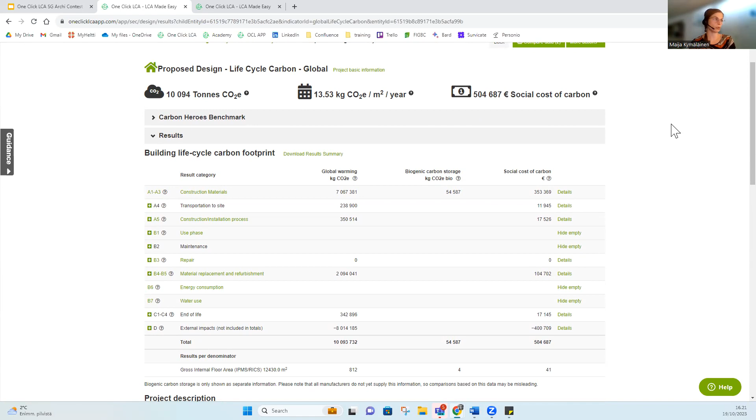And this is the social cost of carbon as well. So if you make life cycle cost calculations, you can maybe extract some information from this, but I don't frankly know much about it. But it evaluates basically the emissions based on this carbon cost. Carbon Heroes benchmark. So this building rates here against all building types in Ireland. So this is where the project was localized.

And then here you can always get more information from the question marks, and you can click these open and see these stages divided into different parts, and from the details you can click open and see the construction materials by this building part, and then click this open, and you can see the most contributing materials and so on. You can print and modify this appearance and so on.

And from more actions, you can get these One Click LCA reports as Word, or you can get them in different ways. And also you can export the used EPDs if you want. But now I think this is pretty clear, at least. Oh, there is actually a question.

So regarding the structural part of the building, what materials do you recommend we use in the structure? We have investigated a lot, and wood and concrete are the ones that they use most in Finland, but we want to see more options, and also if this is real. So for Finnish buildings, it is concrete. That is the most used material for new buildings as well. So like I said, when we were making this carbon designer, putting in the definitions, precast concrete, these kind of ready-made elements are used quite a lot. Sometimes also cast-in-place concrete, but this is something that you of course need to define yourself.

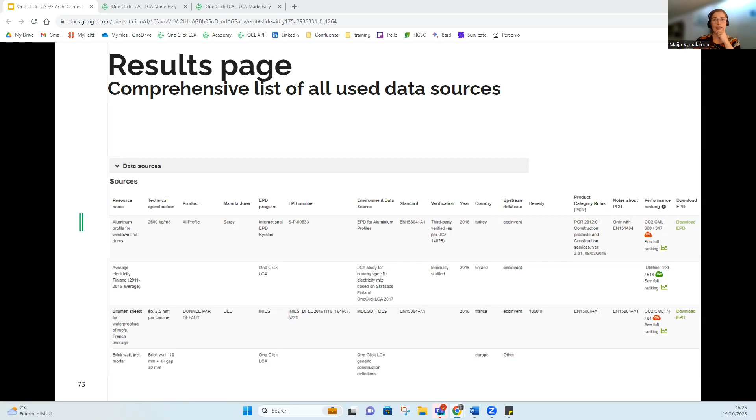So that was it about the software part. We can continue with the homework and question and answer. The homework is not actually homework, but a self-assignment that complements your knowledge on the topic and will help you begin making the actual calculations for your contest entries. These are not going to be checked by anyone, they're just for your own good.

Then use Carbon Designer, make a copy of the baseline design, try how the carbon emissions can be reduced, and identify the building parts causing the most impacts. Continue what we just discussed, but on your own, and try everything you can. Also transfer the designs into One Click LCA and keep applying changes to further reduce carbon emissions. Look into alternative materials and products. How does local procurement affect the overall impacts? How does design for disassembly, the reuse end-of-life scenario, affect the results? These are the questions you will have to answer during the contest, so it's very important to get to grips with them.